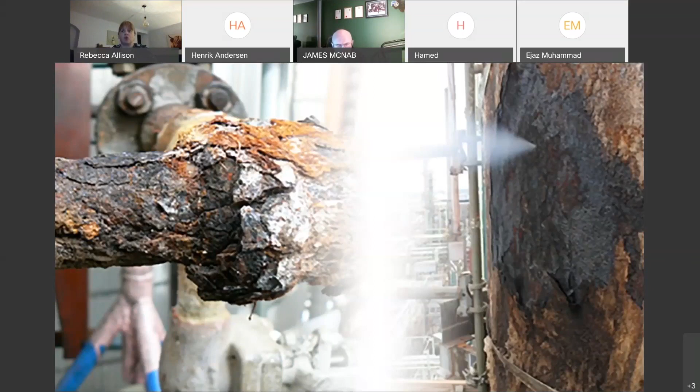So I was saying, why are we still talking about this? Hopefully you picked up some of what I've been trying to get to. So we have guidance notes, we have best practice, we have inspection techniques, but we also have, once we found the problem, we know how to repair and replace.

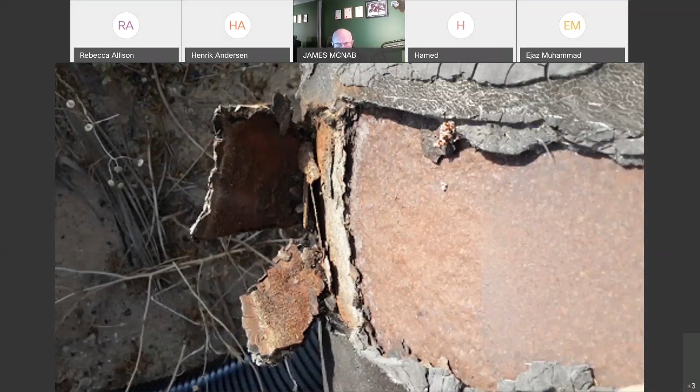So if something goes wrong with Apple, you might not be able to use your phone, or you can't log in for a few days. It's very inconvenient. Also, picking up on the news today, the Co-op and Morrison's have problems with their cardless, contactless payments. It's an inconvenience. But if we get it wrong and we mess up, people can die. And that, to me, is why we should be working to reduce this problem.

The other thing that I think has been really challenging, and again why we're talking about this, is very much around - if anybody's been aware of the CUI over coffee sessions that the corrosion radar guys have been doing last year - they, as part of their ongoing discussions, surveyed the industry to see where they thought their CUI management was. And over 95% of the industry responded to those surveys to say that they felt the CUI management programs were inadequate and needed to be transformed. So again, the reason we're talking about this is because the industry itself believes we don't have a handle on this yet.

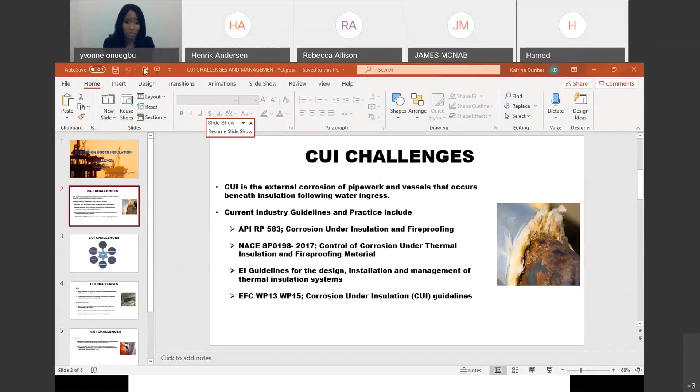So we keep talking about CUI challenges. Why does CUI present so many challenges? For me, it's because we're dealing with a lot of factors or parameters—inspection, temperature, moisture, contaminants, costs, maintenance requirements. So for example, if we pick on...

Temperature, for example—CUI occurs at a wide range of temperatures. If we are looking at carbon steel, we can get CUI from temperatures of maybe -4 degrees centigrade up to 175 degrees centigrade, although the highest probability would be at temperatures of around 30 to 120. And if we are looking at our corrosion resistant alloys, you can get CUI from 30 degrees centigrade up to 200 degrees centigrade.

I must say that the manifestation of CUI in corrosion resistant alloys is in the form of stress corrosion cracking or chloride pitting.

If we pick on the contaminants—contaminants increase the conductivity or the corrosiveness of the water environment. These contaminants, like your chlorides and your sulfates, they can be external to the insulation or they can be leached from the insulation.

And then when we look at maintenance requirements, we're looking at maintenance of the external coating, and the repairs that need to be carried out on the cladding system. So all these things impact on CUI, but for the purpose of this webinar, I will just pick up on a few of them.

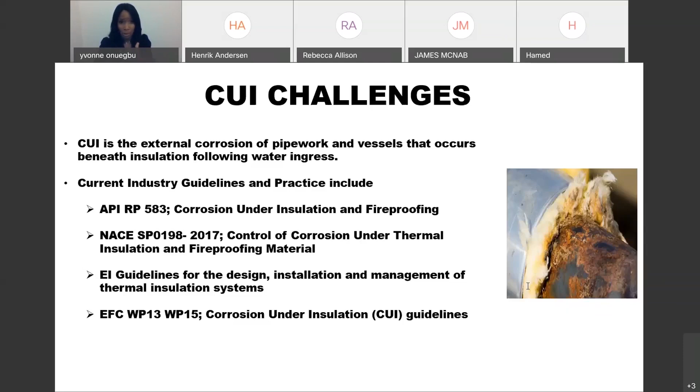And if we look at the next point, we have the justification of the cost benefit in adopting new non-intrusive inspection technology. For me, to date, experience has shown that 100% delagging and visual inspection is the most effective method to provide a current baseline condition from which a CUI, RBI, and maintenance strategy can be developed.

And also in practical terms, it may be more useful to compare the cost of NII versus insulation removal, because the latter can actually be competitive if it's done properly or if it's well organized.

Also, CUI is a complex system. We're looking at a lot of contributing factors—water ingress, temperature, design. And most of these environmental factors are actually impossible to control. So if we're looking at your cumulative wetting, it's unpredictable. And because it's unpredictable, it impacts on the coating life, it impacts on the remnant life of the equipment.

And then we have CUI can be very localized and it can occur anywhere. So this picture attached to this slide is basically CUI on a pipework located in an internal module, like an enclosed module. This pipework is located in the roof, but when insulation was removed, we have CUI.

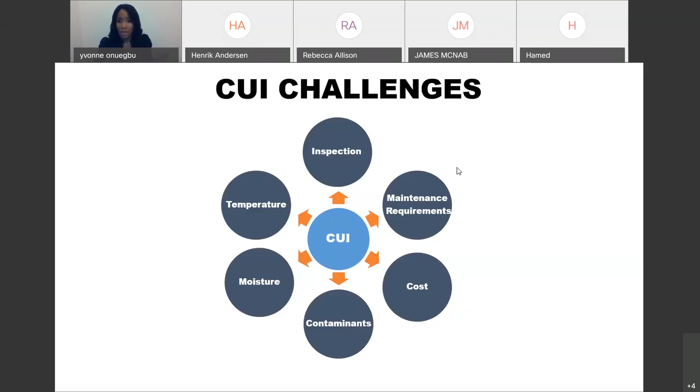So what happened? Basically, water can move underneath insulation and be collected by associated pipeworks and be deposited elsewhere—in this case, in this enclosed module.

We also have issues with detection. External appearance of the cladding may not correspond to the condition of the underlying pipework. So in some cases, we might not even know we have CUI until the insulation is removed, or until corrosion gets to a stage where a failure occurs and we get a leak.

And then if we talk about non-intrusive inspection, NII, we do have some of them—radiography, long-range UT, pulse eddy current, guided wave UT. But these have got certain limitations, such as detection capability of the tool, the cost, the speed, the inconsistent results, the individual interpretation.

So for example, if we pick on radiography, it can be slow, it introduces extra hazards, it requires scaffolding. If we're looking at long range UT, it's basically used as a screening tool to direct where you can strip off your insulation. If you're looking at pulse eddy currents, it will detect gross defects, but maybe not so on minor defects. So yeah, detection can be a bit challenging.

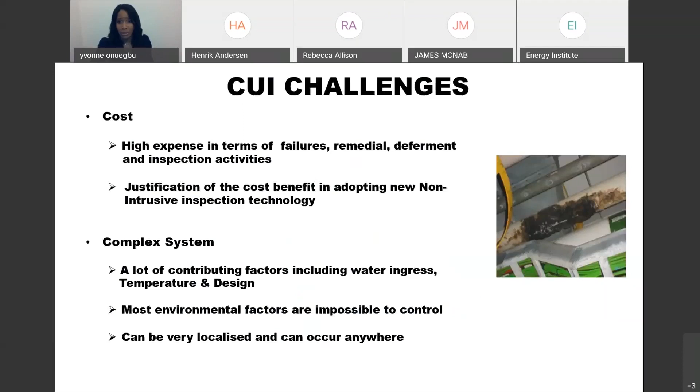Now that we've talked about the challenges, how do we manage CUI? A structured approach is required to mitigate and predict the effects of CUI. I've broken this down into 4 sequential elements.

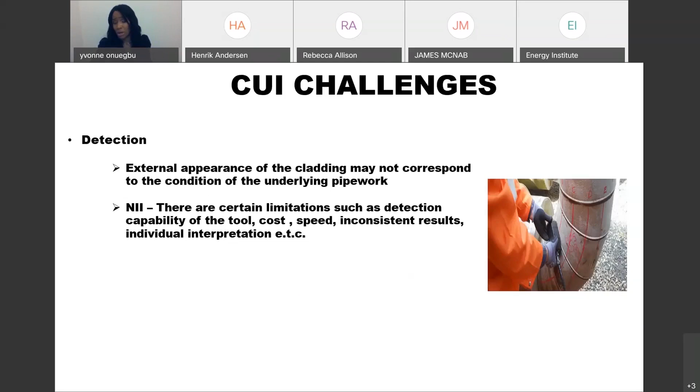The first one I've called investigation. It basically involves elimination and reduction of the CUI risk. So here we're talking about insulation removal, which could be full or partial. This is normally done with input from the process engineer. For example, in full insulation removal, if insulation is required for say personal protection, that can be removed and cages installed. With partial insulation removal, we're talking about removing

insulation from prone areas on the pipework - maybe from the small bore connections, the pipe supports, from your vertical to horizontal bends. This has actually been shown to be quite effective, because it focuses the CUI detection on discrete areas. And in this section, we also need to look into using better insulation specification.

Then the second stage is carrying out your likelihood of failure or probability of failure. There are a lot of inputs into this - you're looking at your temperature, your metallurgy, your external environment. All these are input parameters into probability of failure detection.

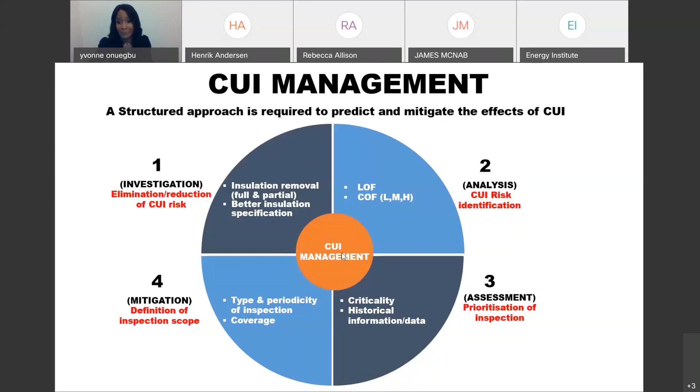Okay, so now for our final presentation of the evening, which is Jim. Jim is the Principal Engineer of Oceaneering Integrity Management and Digital Solutions. He is responsible for developing numerous NDT techniques and evaluating various technology solutions for both topsides and subsea NDT integrity and inspection related issues, including condition monitoring options. So Jim, over to you, please.

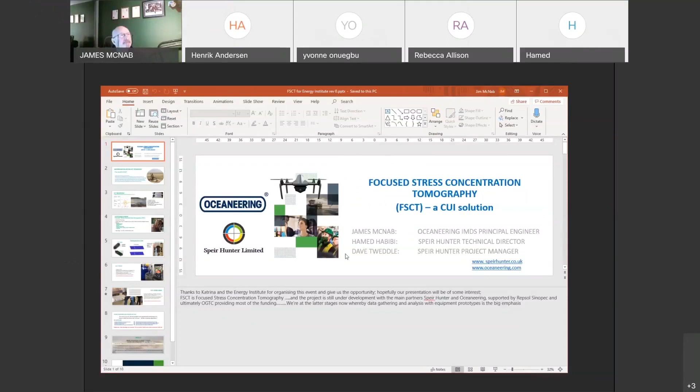How's that? Right, fine. Thanks very much for the introduction, Henrik, and thanks to Katrina and the Energy Institute for organising the event and giving us the opportunity, really. Hopefully the presentation will be of some interest.

FSCT, Focused Stress Concentration Tomography - a bit of a mouthful, even for me. The project is really still under development with the main partners, Speir Hunter and Oceaneering, and we're supported by Repsol Sinopec, and ultimately OGTC are providing most of the funding. We're at the latter stages now, whereby data gathering and analysis with the equipment prototypes has the greatest emphasis.

The technology stems from background on SCT technology. Just a quick background - the technology stems from an existing service provided by Speir Hunter called SCT. It's magnetometry based, and it's an integrity inspection tool mainly for buried pipelines, whereby the pipeline remains in operation, so there's no need to shut down the operations. It consists of somebody wearing the inspection tool, walking over the buried pipeline over desert or farmers' fields or inner city roads - anything that's non-magnetic between the inspector's feet and the pipe under examination.

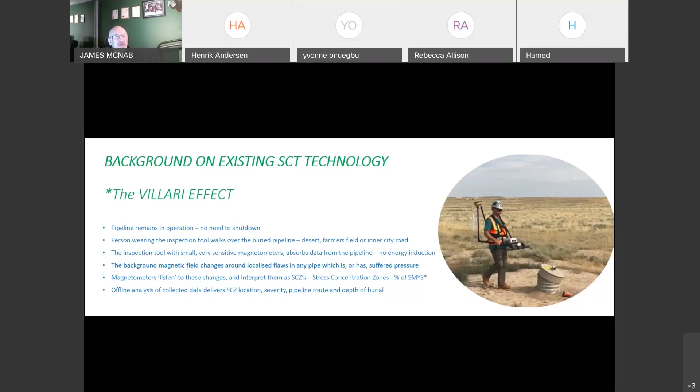Just as a quick one, the conventional large standoff SCT delivers the results in this type of format where it highlights the stress concentration zones, which are in fact readings derived from the small magnetic field changes in a pipeline.

Whether under pressure or not, or has seen pressure, this is actually called the Villari effect, and it's expressed as a percentage of the specified minimum yield strength.

This particular example here is a case study of the SCZ as it occurs, the SCZ based excavation, and Dave actually knows a little bit more about that. Dave, you online just to tell us what happened with this?

Yeah, thanks, Jim. This is really just to give everybody a background to the technology and how the success of the standoff technology has led to its adaptation for focused finding of the specific CUI problem.

So here was an example of a pipeline that we inspected in Europe. The inspection was completed, offline analysis results were completed. And it's quite difficult to explain, but the second left-hand graph, you can see with the yellow circle, they're highlighted.

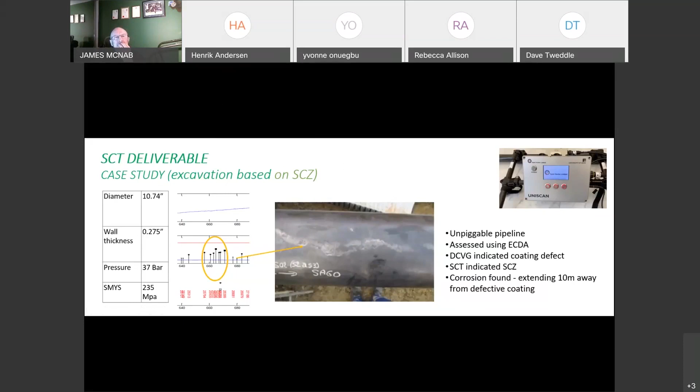Thanks, Dave. The new initiative really centres on a CUI solution, and if you look to the right, you'll see Mr. Ed. I don't know if some of you may be too young to remember the talking horse that used to be on the television, but Mr. Ed is on the right-hand side there.

And this new technology is based on the SCT technology, but it's focused, or it's blinkered from external magnetic influences.

And so the idea is really just to focus the listening for the magnetic anomalies in a specific area rather than more generally as SCT does.

The objectives for the project were a quick screening tool. It had to be non-intrusive, obviously, a passive technique, as I explained before. There's no energy induction, no insulation removal, and a real-time result where it categorizes results into severe, moderate, and minor.

We're wondering whether at the moment they change that just to two categories, whether just corrosion or no corrosion. But we're at that stage, but we'll need more data to decide on what categories to do. It had to essentially have a high probability of detection.

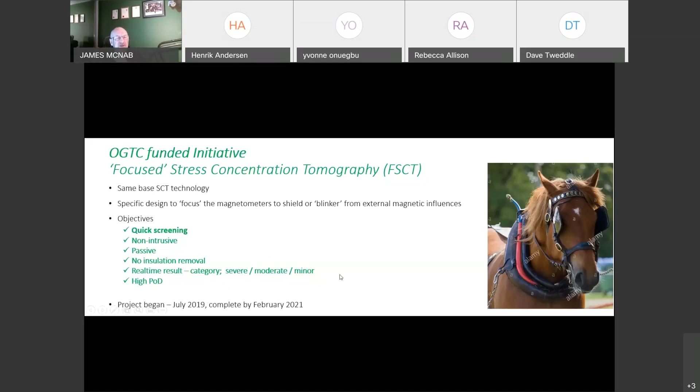The project began in July 2019 and it should be completed next month.

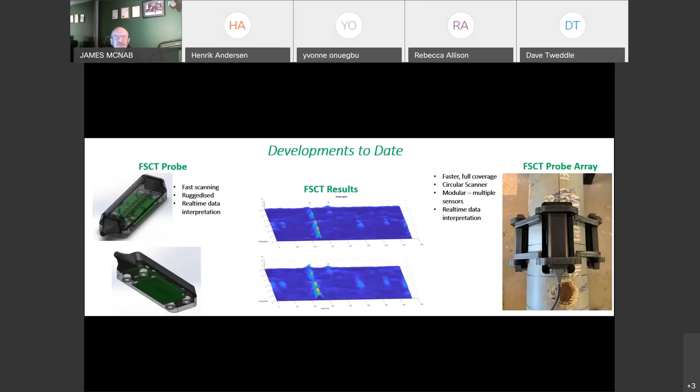Our initial handheld probe in action at St Fergus. Note the gridded bands I've put around the pipe just guide us where to put the probe so we can ensure coverage. The buttons to operate it are on the probe itself, just above my fingers there.

It's ruggedized to IP65 and collects an estimated 20 samples per second, giving that kind of coverage area. The data is collected in circumferential and/or axial direction, and we're actually thinking the axial direction seems to be a better way of collecting the data.

It's currently been tested on 4, 6, 8, 10 and 20-inch diameter pipe samples, mainly on corrosion that was found previously and had some repairs. So we're looking for samples with actual unrepaired corrosion to test it on.

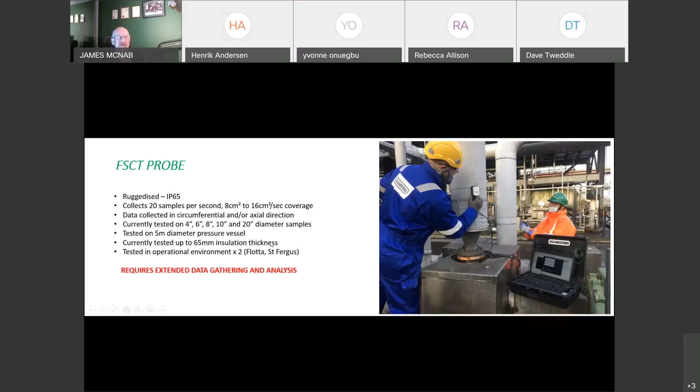It's also been tested on a 5 meter diameter pressure vessel, currently up to 65 millimeters insulation thickness, and thanks to Repsol, Sinopec and Shell for allowing us to get out to St Fergus to try it out. But note the red writing at the bottom: it requires extended data gathering and analysis, and we're still at that stage.

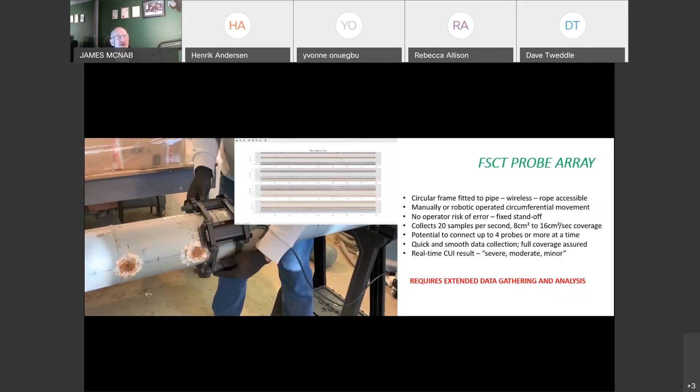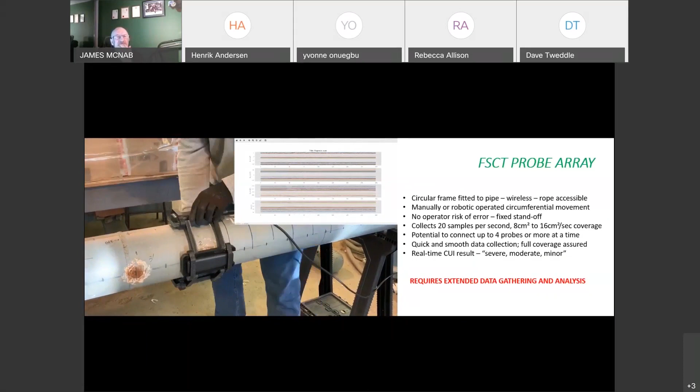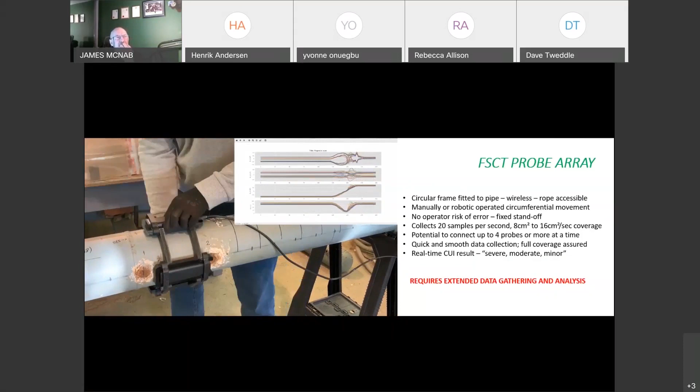This short clip shows the real-time nature of the results. If you look at the right-hand side, you'll see the results fed back in real time as the probe scans across the CUI. Although it's not got any insulation on, you can see the principle of operation with the result shown in real time. But note this is only a single probe in this ring.

That's how he's having to revolve it. The eventual tool will have 4 probes in the ring, and that will give data, moving only axially without any circumferential movement.

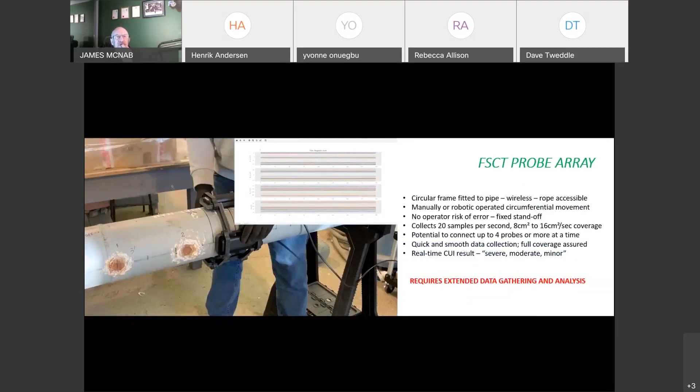Third last slide, I think it is.

To summarise, the development project needs access to a lot more pipes and vessels with real CUI, and this is what we're asking for your help with. We need as much data as possible from operational environments to improve both the hardware and the software. It's all about training the algorithm, so we need to test a variety of diameters, insulation thicknesses, and insulation types.

And what does focus really mean? Will we be able to go over a pipe support, since it will have a magnetic influence on the signal? Parallel pipes we also need to try and test. But the bottom line is the technology will definitely see the corrosion and get a signal, but we need to train it to tell how severe that signal is in terms of remaining wall thickness.

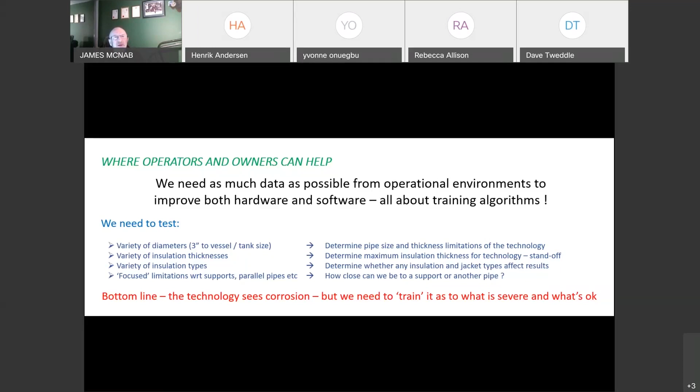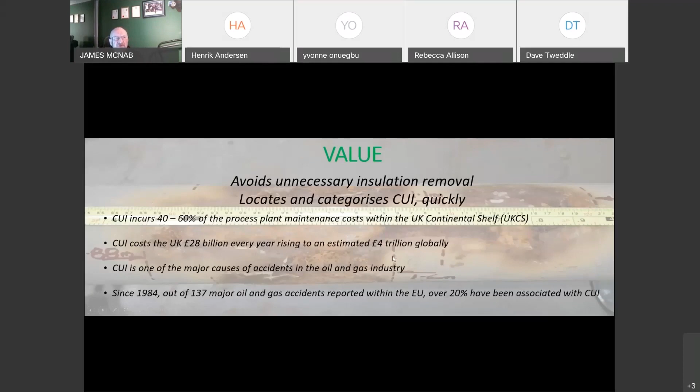We've got a reminder, as if you needed it, of the costs to the industry. You can look that up, you've already got the slides, but that's just giving you some figures in the billions. The main thing though is the cost to the industry, especially to the health and safety of our people.

The last slide here is just a short animation we've done. I'll try and turn the volume down there.

Are you still okay to hear me there? Hopefully. Is that animation coming up okay, Katrina? Yeah, we can hear you, Jim.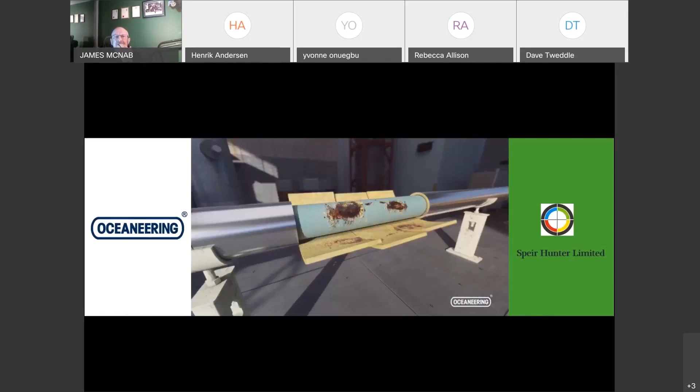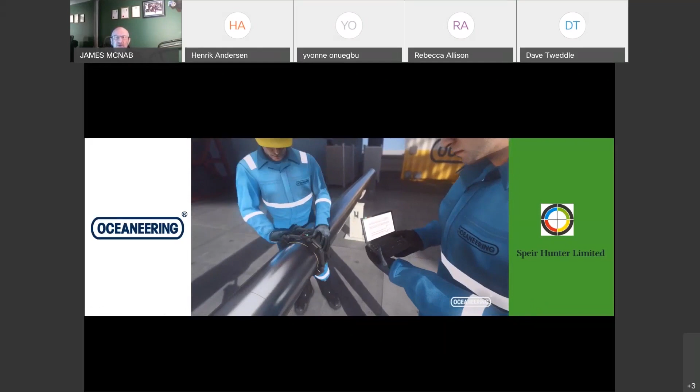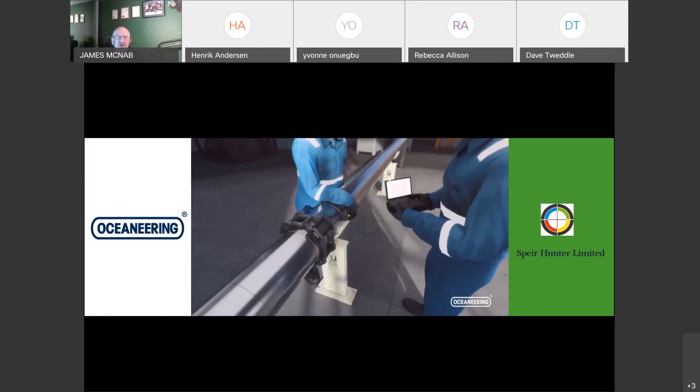Yeah, the animation, sorry if it's a little bit bitty, but it shows the principle that there's corrosion underneath that insulated pipe. One operator has a light telling them it's green, everything's okay. You'll see the light change to red on the tool and on the palmtop computer. When it comes to a pipe support, we can go to the other side, but we fill in the bit where the pipe support prevents the circular tool by using the handheld tool, which works on exactly the same principle, going from red to amber to green.

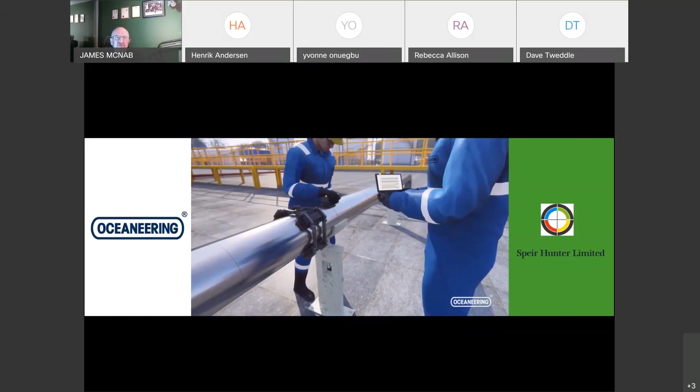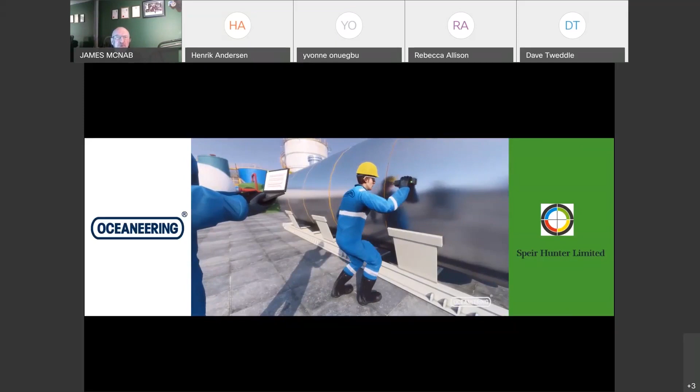So same again onshore, same tools onshore. The reason we included this bit was to show that the handheld tool, see it going there from amber, might go back to green to show it's okay. But we can also use it on vessels and larger diameter pipes, given the same principle. We would have gridded that vessel up too, the only thing I missed out there.